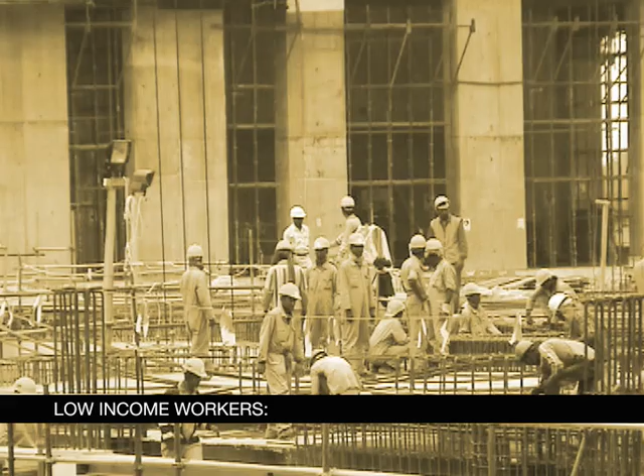Currently, 85% of the population in Dubai are expatriates, and this figure is expected to rise. Within the population, approximately 25% are considered low income. These are the construction workers who are building the new city and the service workers who will replace them as the city is completed. The low-income workers come from India, Pakistan, and surrounding Arab countries.

They represent a globalized labor force in Dubai on short-term 3-year visas, migrating to earn greater income to send back to the families left behind. The average salary for a construction worker in Dubai is $150 per month, and for a service worker, at least twice as much.

To house the 6.5 million people who will be living in Dubai by 2015, hundreds of luxury residential projects are currently under construction. However, up until today, only 50,000 units have been proposed for the lower-income workers who will service and maintain that luxury. By comparing other service-intensive cities and countries such as Luxembourg, the United Kingdom, and Singapore, it is estimated that more than 1 million low-income guest workers will be needed in Dubai by 2015.

Since Dubai has branded itself as a city of luxury and exclusiveness, the mere presence of all of this low-income housing would create an overwhelming visual effect and be awkward.

We at KDG, the Kartun Development Group, recognize this challenge. This proposal presents a strategy of integrated separation.

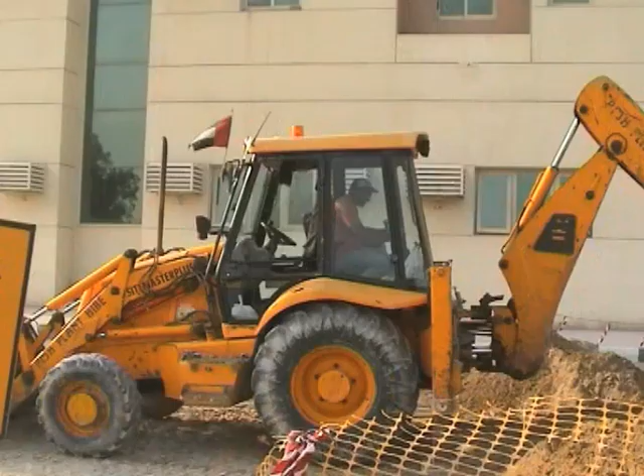Today, thousands of workers are concentrated in large camps hidden outside the city. Such a solution will be hard to sustain in light of Dubai's continuing outward growth. Once surrounded by expanding urban fabric, the visibility of the camps is now unavoidable.

And with a presumably distinct contrast between the existing workers' camps and the expected luxury of the growing city, the camps risk demolition or exclusion as slum areas.

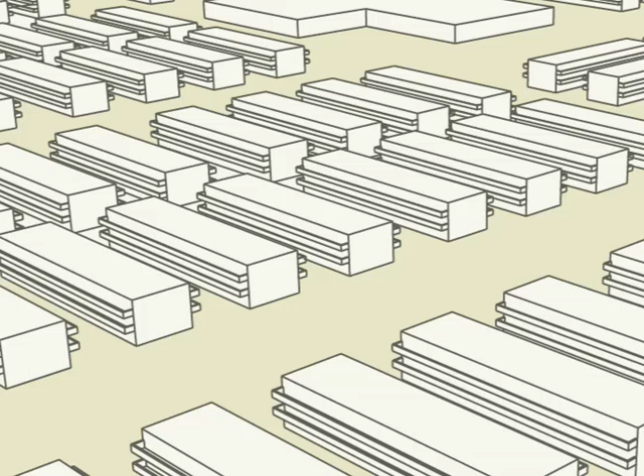And while the construction workers who are housed in the camps are bused to their jobs en masse, the future service workers will find employment scattered throughout the emirate. The concentration in camps on the periphery would make their necessarily more individual commute almost impossible, not to mention adding to the already extreme traffic burden.

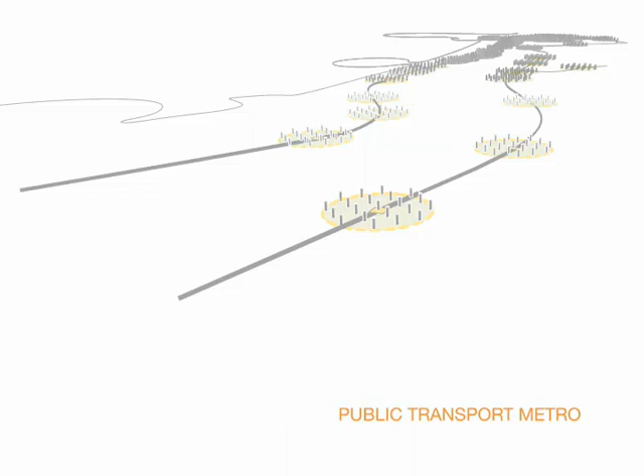Instead of a conventional state-sponsored low-income housing strategy, KDG proposes a location strategy based on principles of integrated separation and incremental implementation. 500 inexpensive high-rise buildings with minimalized footprints are inserted throughout the emirate.

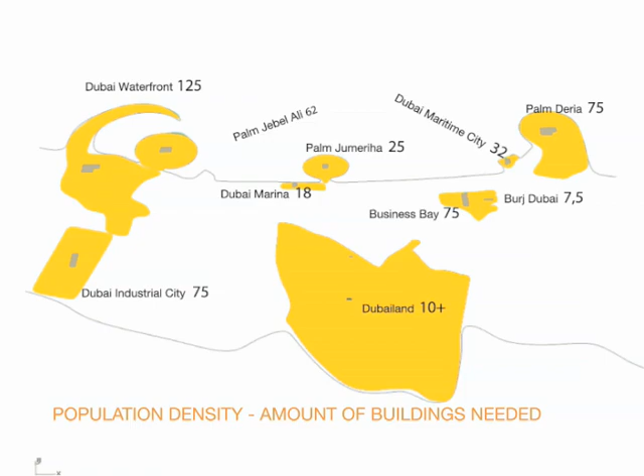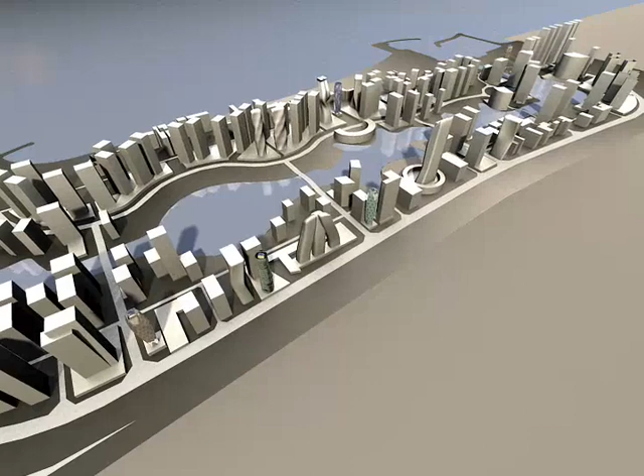The buildings are carefully distributed throughout the emirate to provide residents with efficient proximity to their work and/or public transport. The towers are discreetly integrated into the urban fabric to offer privacy and security for both the residents and neighbors. To achieve this state of invisible omnipresence, KDG will rely on visual and programmatic methods, camouflaging the workers' housing from the city.

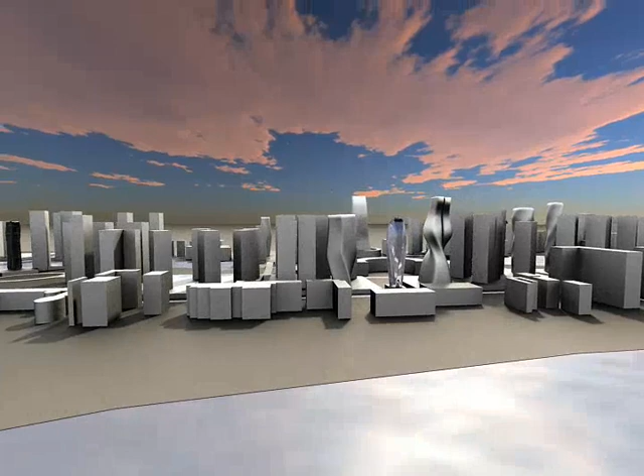Higher rent mixed-use occupants inhabit the outer building layer with a profit-generating view. The program of the outer layer differs due to context of the building's insertion points. This outer layer will generate profit for the development to offset the costs of less profitable guest worker units.

The exterior of the building exhibits no sign of the workers' presence within. The building will blend unobtrusively into any of the high-rent sections of the city. Such measures help to avoid banishing the workers to the outskirts of the city, but also prevents them from being on display for the patronizing pity of the more fortunate expatriates.

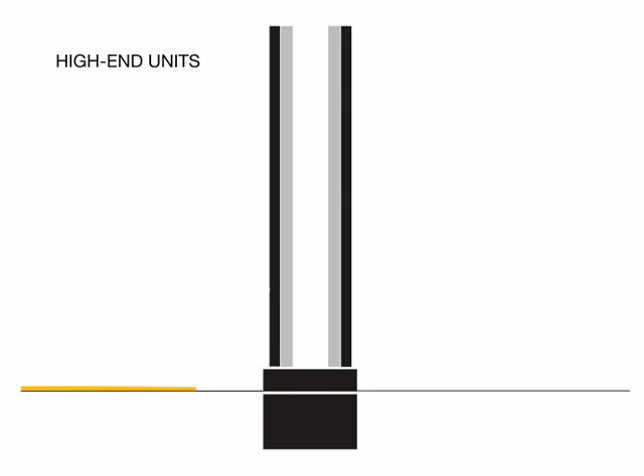The development emphasizes a symbiotic relationship between the low-income units and the outer layer of high-end development. A dual circulation system is provided to allow cohabitation and separation. High-end access is provided through an underground garage or street-level lobby.

Workers access the building from a separate entry on street level, immediately ascending to the second floor where a mini-mall provides the necessities of everyday life. In fact, the design ensures that the two worlds remain invisible to each other.

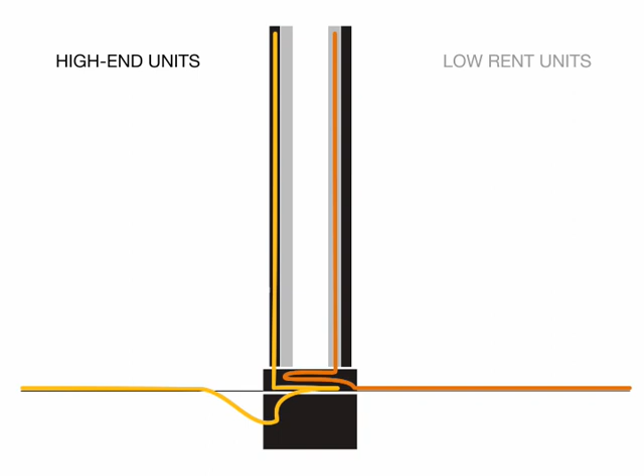The towers are composed of a concrete structural frame with its thermal mass cooling the interior section. Within the frame, mass-produced prefabricated bedroom units are inserted.

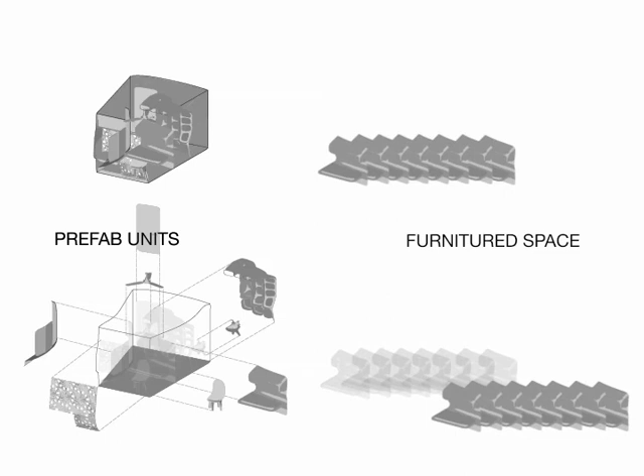In collaboration with IKEA, built-in furniture is provided for these bedrooms. Mechanical systems are integrated within the voids between the supporting structure and the bedroom units. By combining low-tech concrete structures with high-tech mass-produced units, cost efficiency and well-designed living spaces are accomplished.

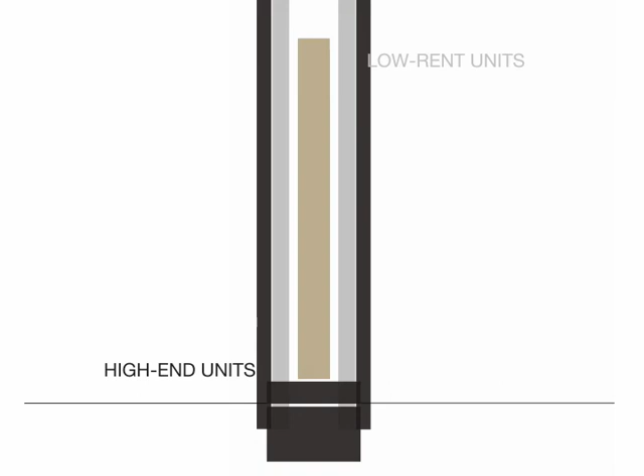In 2007, Sheikh Mohammed decreed that Dubai must aim for environmental sustainability in all its buildings. Here, a core of inward-facing, low-rent units surrounds the full-height light and air well. A complementary system of cross-ventilation, desiccant systems, and chilled walls will maintain livable conditions at low environmental impact within the interior setting.

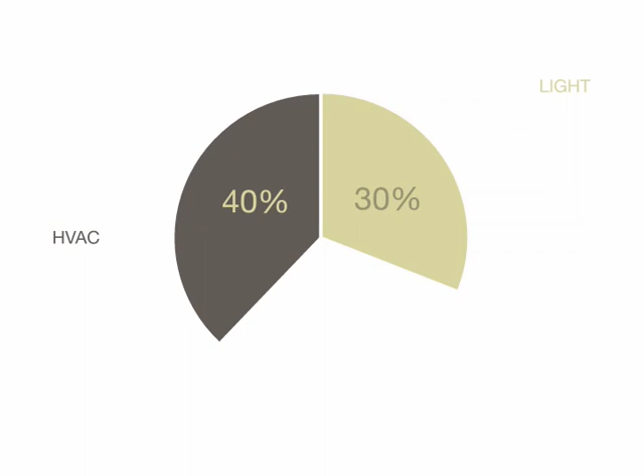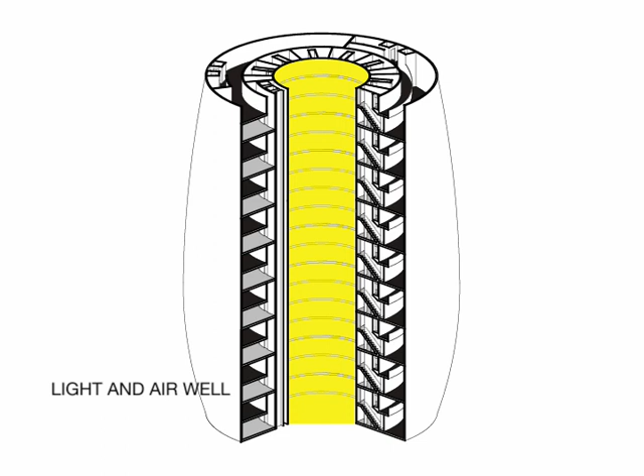On average, 30% of a building's energy consumption is used for light, 40% for HVAC, and 30% for other electrical facilities. The 14-meter diameter light and air well decreases energy consumption by ensuring natural daylight for the low-income workers. The light well incorporates multiple openings oriented vertically to follow the solar path.

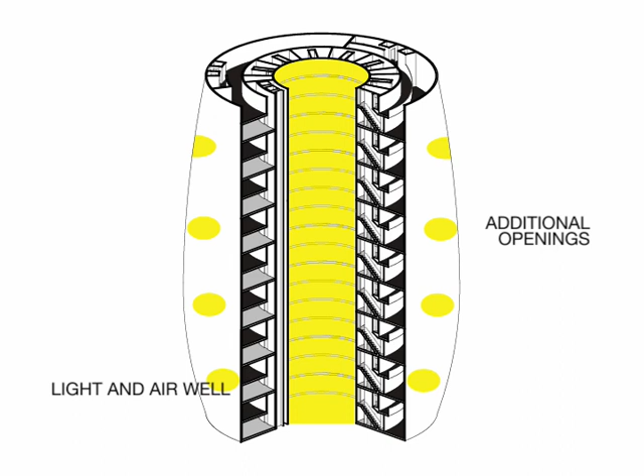Thereby, this light well is as efficient as a 7-meter setback of a regular block, but using only 20% of land. The circular profile of the well minimizes surface area and associated materials and represents a 20% savings in bracing.

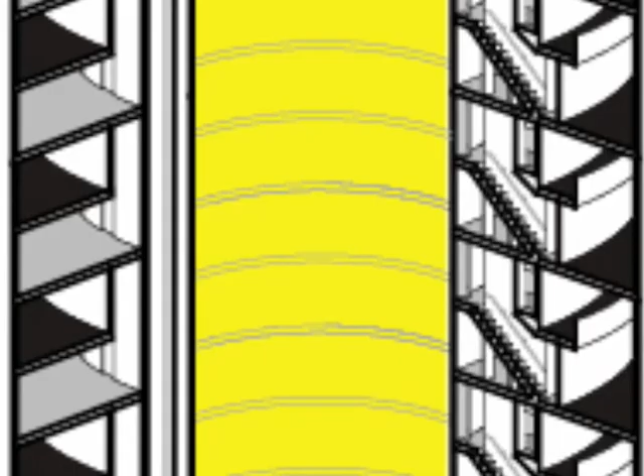This development is focused on meeting the needs of the individual guest workers in a humane manner. The workers are provided with privacy as well as spaces for personal well-being and social networking. Kitchen, dining room, and laundry are community spaces on every other floor.

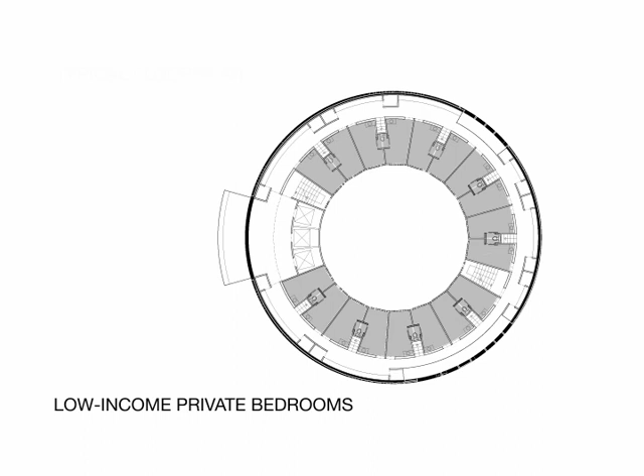On each floor, 18 private bedrooms face the light and air well. Built-in furniture guarantees no unnecessary expenses for the short-term workers. Semi-private bathrooms serve 2 units. A vertically shared circulation on every other floor completes the efficiency of the plan.

While this development is clearly not intended as social housing or a worker's paradise, it is committed to serving the workers' actual needs and aspires to ennoble their humble station. It could even be said that the proposal dramatizes the workers' true position at the center of this emerging nomadic society.

The development promises affordable and humane living conditions for the guest worker. At the same time, it is responsive to its surroundings and sustains property values. The strategy of an integrated separation is therefore a policy of invisible alliance.